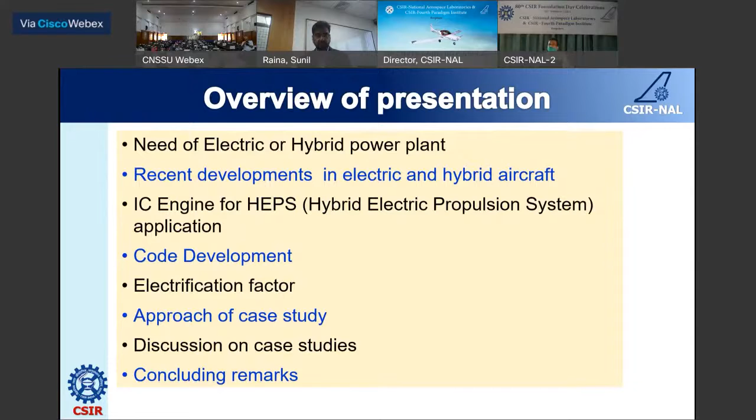There was a requirement to develop a code to analyze the performance of the aircraft for different proposed power plants, so I will briefly discuss the code development activity. Then I will discuss the details of the present case study with its results and concluding remarks.

In the process of converting the fuel into products, a combustion reaction happens and heat is released, and this heat is used to do the work called thrust. In the process of getting energy out of the fuel, combustion products are produced: water vapor, carbon dioxide, carbon monoxide, unburned hydrocarbon fuel, and NOx. This carbon monoxide and unburned hydrocarbon represent the degree of incomplete combustion.

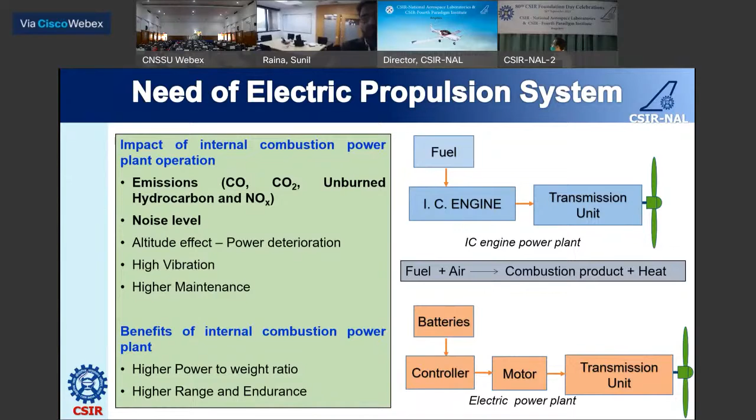But still, the major advantage of our conventional IC engine power plant is the two things I showed here: one is the high power to weight ratio, and another is the higher range and endurance. Why is this still beneficial for IC engines? What was the issue with electrical propulsion with respect to this point will be discussed in the next slide.

But in the case of electrical power plant, we have a really efficient motor with lesser weight, but the major weight is occupied by the battery, which is close to 11.5 kg. This shows the minimal energy density of this battery technology available today.

If you take the battery energy density available, it is close to 250 to 300. These numbers are continuously increasing, and a lot of research is going on to further improve this number. But if we compare this with petrol density, it is 50 times lesser. Our fuel has an energy density of around 12,500 watt-hours per kg.

So in order to compare these two, we have to bring in the efficiency of the machine also. The motor has an efficiency around 90%, and the engine has an efficiency around 30% only. If you convert this, the power density of the electrical power plant per kg will be 6% of the power density of the IC engine power plant per kg of fuel used. So this is the major limitation in the area of battery technology. This needs to be improved.

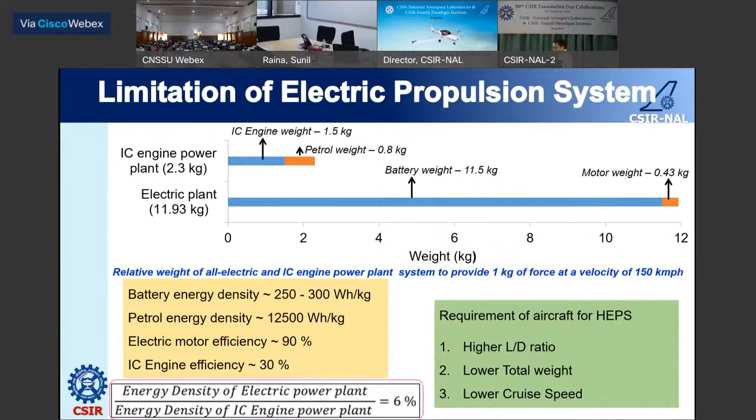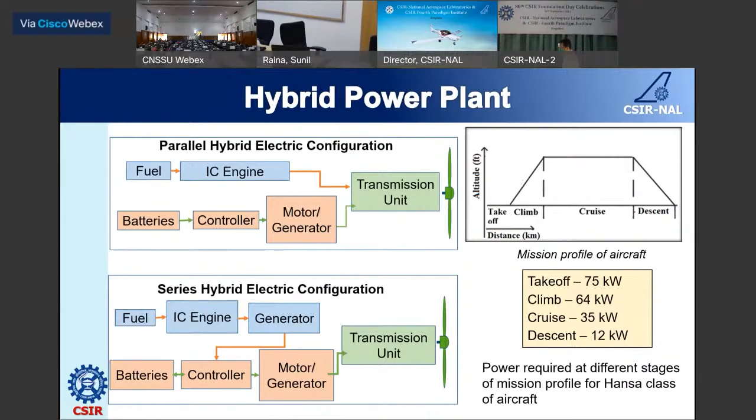There is one more aircraft called the Extra 330 LE, also a 2-seater aircraft, with an endurance around 24 minutes, and it had a feature of a higher rate of climb capacity.

Later, these all-electric aircraft were converted to hybrid mode in order to increase range and endurance. So this Pipistrel was converted to hybrid mode, where a series configuration is used with the Rotax 912 engine, and they use a motor of around 150 kilowatts.

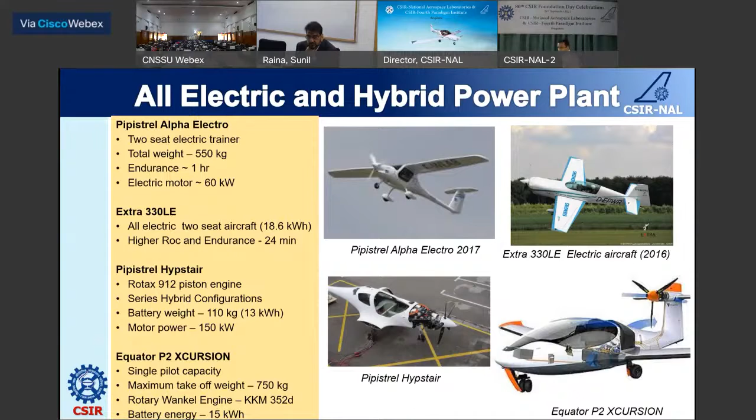There is another aircraft, initially started with all-electric mode, then converted into hybrid mode with a rotary engine, and the maximum takeoff weight is 750 kg with a single pilot capacity.

There is another aircraft from the University of Cambridge, a single pilot aircraft called the Song aircraft. This is an ultra-lightweight composite aircraft using a series configuration. This configuration was also demonstrated.

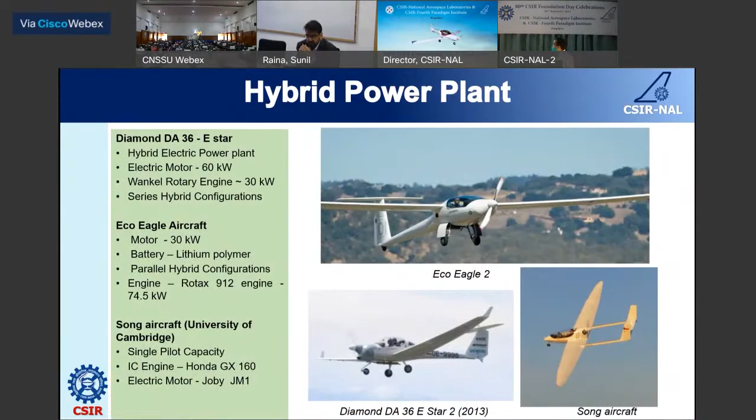Now the idea is using existing IC engines to constitute the hybrid electric power plant. With that direction, we have carried out a list of IC engines available for this class. As of now, there are no ready-made IC engines available for hybrid application, but in the near future we can expect engines designed for hybrid applications. So only existing engines of these classes are converted for hybrid power plant systems.

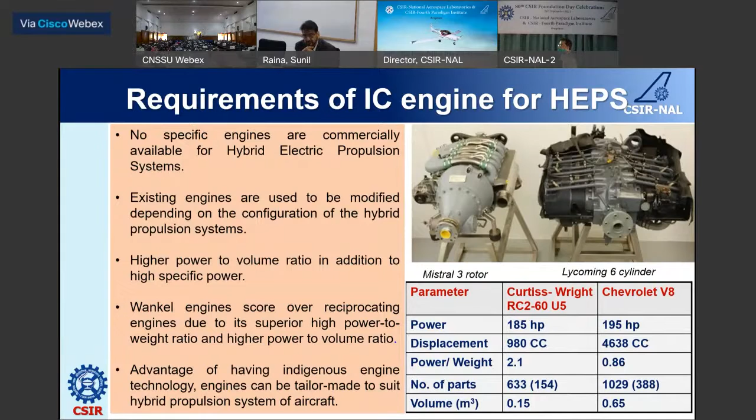Here is another product of NAL, the NAL 65 HP rotary engine. At NAL, we have developed expertise in rotary engines for different power classes. The 55 HP rotary engine was used to fly the Nishant UAV, the 65 HP rotary engine was developed for Panchi UAV application, and another 30 HP engine was developed for an air-cooled concept.

These are all the specifications shown for the 65 HP rotary engine, and this is used to construct this hybrid power plant. The performance of this engine with respect to aircraft performance is considered in the present feasibility study.

The overall idea is, within the bracket, the power of the Hansa aircraft is shown. During takeoff, around 75 kilowatts of power is required. Out of this 75, around 48.5 kilowatts of power can be taken from the Wankel engine, and the balance will be taken from the electrical unit with the combination of battery and motor.

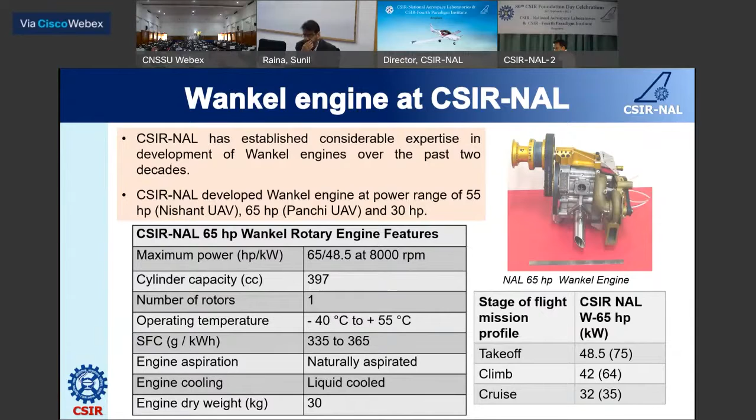In that direction, we have done a feasibility study. In addition to the existing Wankel engine, we have considered some more IC engines available, and the power class of around 50 to 65 HP engines are selected. Here, in addition to the rotary engine, we have shown some reciprocating engines of both two-stroke and four-stroke.

Here, again, you can see with respect to power to weight ratio and power to volume ratio, rotary engines are showing a higher number compared to piston engines.

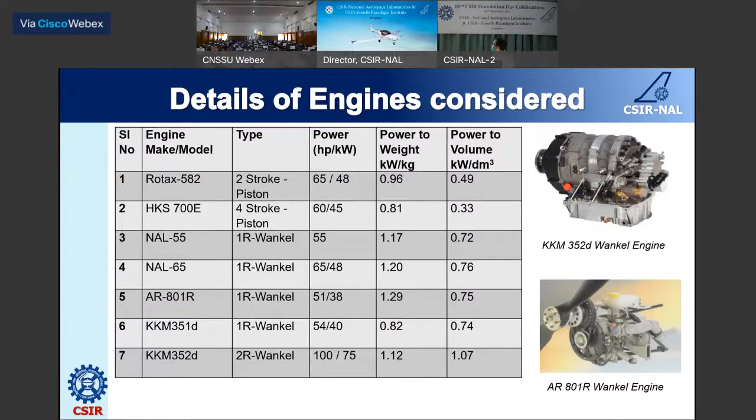Based on this number, we have carried out the volumetric feasibility calculation. We have taken the existing model cowling of the Hansa NG aircraft, and proposed the IC engine power plant with the electrical motor and battery to see if they are able to fit in that. Based on that, two of the IC engines could not be fixed within the existing cowling, so these two engines are rejected and removed, and five engines are used for the case calculation.

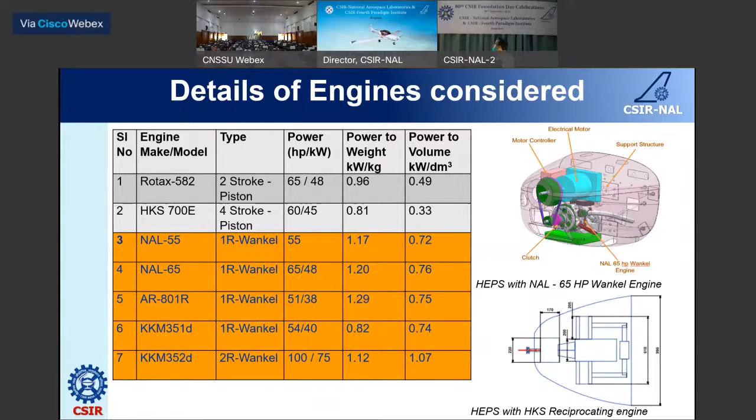Here the battery and motor details are shown. The Rotax engine is taken, and the motor is taken. There are two motors considered in the present analysis. The 17 kg REX motor with a power of 50 kW is taken for the hybrid configuration.

In the present feasibility study, we have also considered an all-electric power plant, which requires a higher motor. So around a 70 kilowatt motor is taken for the all-electric case, and three different battery packs are chosen. Based on the power and merit category, one of the battery packs and one motor is chosen for each case.

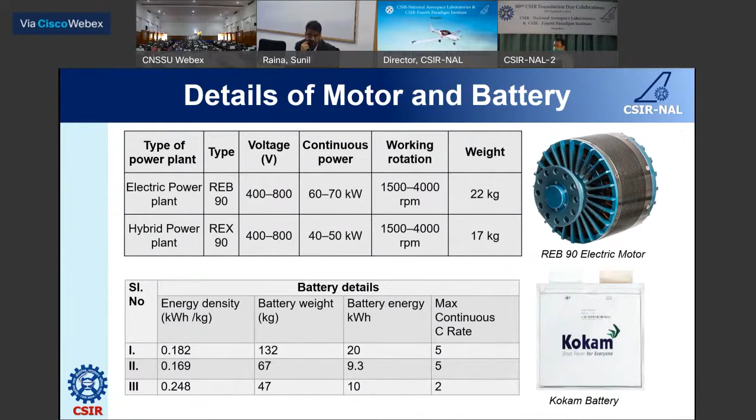There is a requirement to develop a code to calculate the range and endurance of the aircraft for different power plant usage. So we have developed the code. Here the thrust power of the aircraft, propeller power, and engine powers are equated together, and the overall range and endurance are calculated.

The approach takes the propeller characteristics, engine power characteristics, and aircraft parameters into account. In each stage of the mission profile, the distance covered by the aircraft, the time taken, and the fuel flow consumption is calculated using this equation, and the overall range, endurance, and total fuel consumed is calculated.

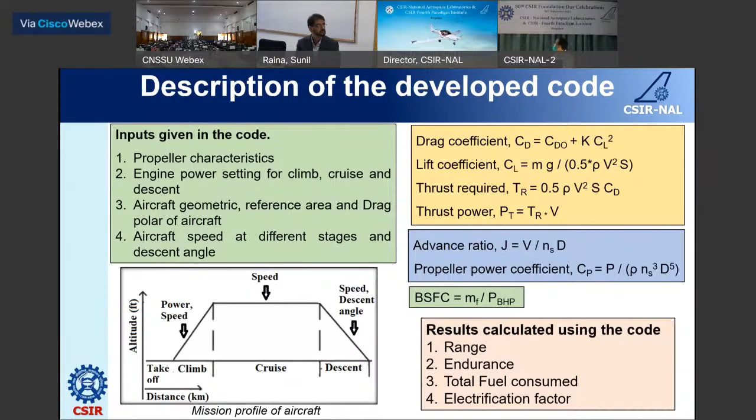These are all the performance plots used inside the code to arrange the results, and here the major architecture of the code is shown.

The operating conditions vary with respect to each stage of the aircraft, and cruise altitude variation and densities are considered. During the climb stage, the engine power is balanced with the propeller power, and with the propeller efficiency, thrust power and other forces of the aircraft are calculated.

During the cruise stage, the four forces of the aircraft are balanced first, then based on the thrust and thrust power, the engine power is calculated. Finally, the code gives the result for range, endurance, and total fuel consumption for different configurations of the hybrid power plant.

Initially, the results of this code were compared with the available data of Hansa NG, and with 3-4 iterations of fine tuning, the results of the code matched very well with the available data. This gave us confidence in using this code for hybrid power plant applications.

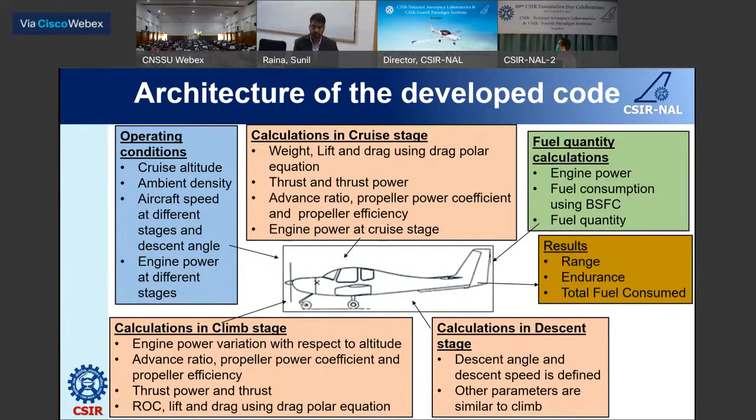In order to implement the hybrid power plant, a component factor called the electrification factor is taken into account. The electrification factor is defined as the power from the electrical unit divided by the total power available in the configuration, which is the electric power unit divided by the sum of electric power plus IC engine power.

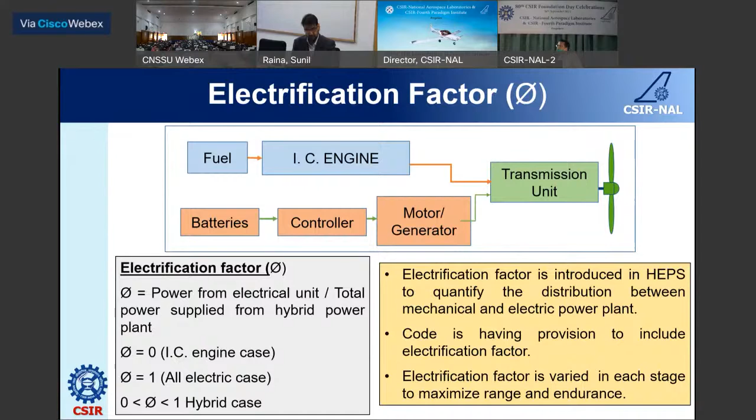With this definition, phi equals 0 is the IC engine power plant case, phi equals 1 is the all-electric case, and phi varying from 0 to 1 is the hybrid case. We made a provision to use this code to investigate the effect of this electrification factor, and we have optimized the range and endurance with respect to this.

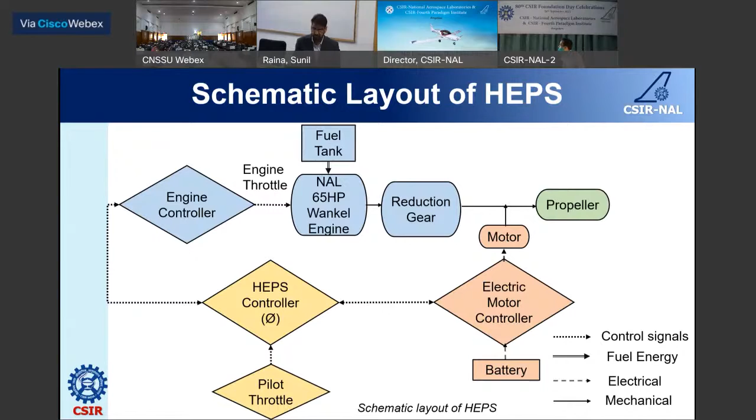This is the overall schematic layout of the configuration. In addition to the electric power plant and the mechanical power plant, we should be able to develop the electronic controllers also. So two controllers are required: one is the engine controller to vary the power settings with respect to the requirement, and there is the electrical motor controller required. These two controllers will communicate to the hybrid electric propulsion controller, and it will be controlled through the pilot. So this is the overall architecture of the HEPS configuration.

This is the major outcome of this work. For the present hybrid power plant construction case, this is the condition we have taken: the existing Hansa aircraft power plant weight is close to 115 kg, and the fuel weight is close to 85 liters of fuel, around 65 kg. The total weight is around 180 kg.

In the hybrid power plant case, we kept the same weight of 180 kg, where the IC engine, motor, battery, and fuel weights are kept well within the 180 kg. So the power plant weight of the proposed hybrid unit and the IC engine unit was maintained constant, and the overall all-up weight was kept maintained constant. The present Hansa engine has an all-up weight of around 750 kg, and we have maintained the same case.

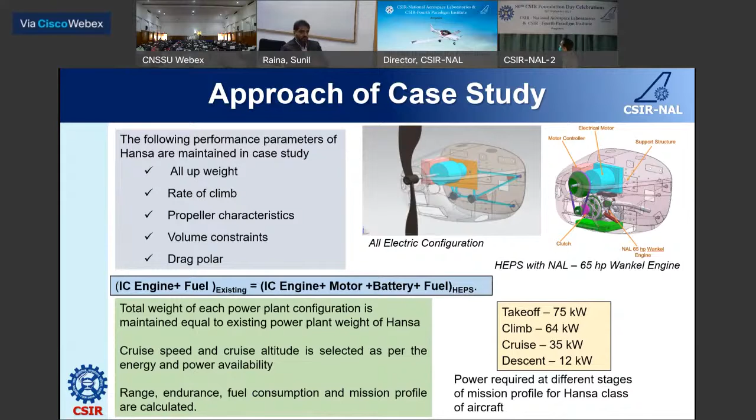The rate of climb, propeller characteristics, volumetric constraints, and drag polar of the existing Hansa are maintained the same. Now there is a different power requirement at different stages of the mission profile, so each proposed configuration will meet this power requirement with respect to the electrification factor. Here the volumetric feasibility study characteristics are shown, and here the results are available.

As I already mentioned, the all-electric case is also considered as a reference case, so we can see how our all-electric case compares with hybrid in terms of range and endurance. The present Hansa has a range around 900 kilometers with an endurance of 6 hours by using the IC engine power plant. But the all-electric case can give a range around 80 kilometers with an endurance of 36 minutes.

During takeoff and climb itself, almost 50% of the energy is consumed. The balance 50% is used to do cruise and descent. Since the energy availability was limited, we fixed the cruising altitude close to 4,000 feet, and the cruising speed is maintained close to 160 km/h.

In this study, three hybrid configurations are taken with three different engines, and the balance energy will be supplied by the motor and battery configuration, represented in terms of electrification factor value. During takeoff, the electrification factor is maintained at 0.21 for the AR801 engine case, and these five cases represent different electrification factors, moving from the all-electric case to different hybrid propulsion configurations.

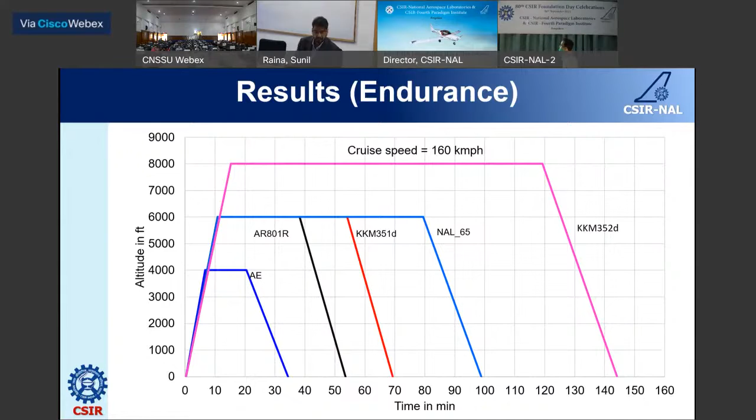And this is the range distance - the NAL 65 can reach up to 240 kilometers. In addition to range and endurance calculation, we calculated CO2 quantification per kilometer. Compared to the IC engine CO2 values, the hybrid power plant values are much lesser.

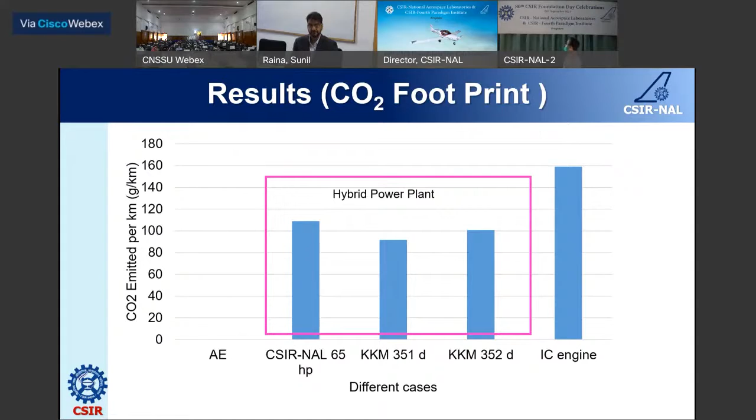And in addition to constructing this hybrid power plant, these are all the major technology challenges: identifying the compact electric motor and the higher power density pack, thermal management of battery, motor and generator configurations, and importantly, aeronautical certification.

So from our case study, these are the conclusions we are making. It is possible to convert the existing aircraft as an all-electric or hybrid unit, and the developed code was very much useful in order to estimate the preliminary performance of the aircraft to get the range and endurance.

In the all-electric case, with the ceiling limitation of 4,000 feet, we could be able to get the endurance around 36 minutes. And with the proper selection of engine configuration, the cruising can reach up to 8,000 feet with the endurance from 1 to 3 hours.

And the CSIR-NAL 65 HP engine is a prominent contender to use this hybrid configuration. And the CO2 footprint of HEPS is reduced by 42% in comparison with the existing conventional ICE engine.

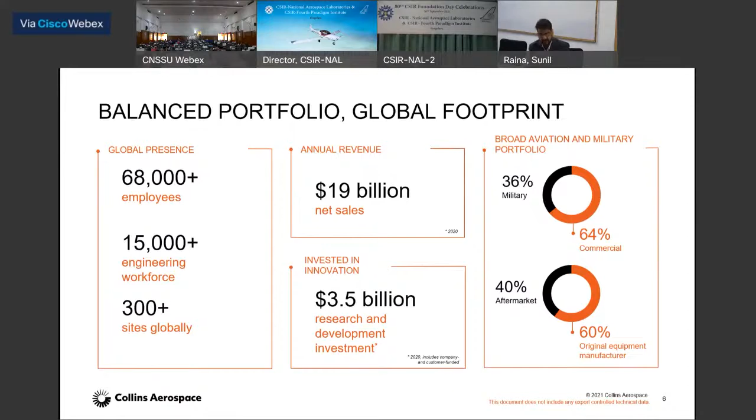We are not a US organization anymore. 300 sites globally. Even in India, we have about 6 sites today, and a lot of engineering force globally, about 15,000 plus.

The way Raytheon is divided into 4 business units, Collins Aerospace in itself is divided into 6 major segments, which we call strategic business units. Obviously, we touch almost every part of the aircraft today, so it was very important for us to divide those different pieces into different areas like aerostructures, avionics, interiors, power and control. Mission is mostly the government or defense side of the business, and then mechanical. We'll go a little bit more deeper into each of them.

Aerostructures, as the name suggests, it's more about composites, the nacelle systems, the structures which we manufacture. We are doing a lot of innovation on that, so that is where aerostructures comes into picture.

Avionics, we have done a lot of business with NAL as well previously. It is mostly the avionics systems, but with United Technologies coming in, we are now into cabin management systems, sensors, and fire protection. I wanted to touch a little extra on information management. It is not only the data link piece there, but we have a big stake in airports globally now. In India, we are working with Airport Authority of India, and with the private sector, trying to see how we bring our latest technologies to the airports here, especially with COVID, the lot of contactless is the way going forward.

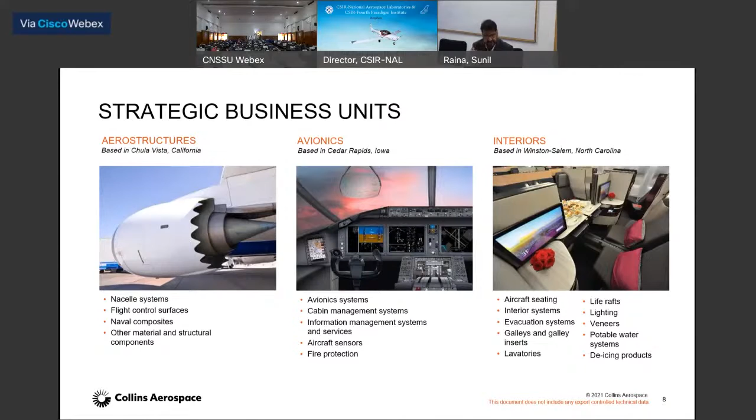Interiors, the name suggests itself, anything in the interior. Talk about the seats, or the galleys, or the lavatories, lighting, veneers, anything on the interiors part we are dealing with today.

Mechanical, we are into landing systems, actuation, propellers, control systems. Similarly, mission is more critical towards defense. It is not only the ground-based equipment and nav we sell there, but we are using our technologies from the other SBUs and giving it to military platforms. We have a lot of business on the space side from this business unit, especially even with ISRO here in India, where we are working and giving them some solutions. We are also working on unmanned aircraft systems.

We are not developing an unmanned aircraft, but more towards the complex systems which are required to fly those kinds of aircrafts, and then the ejection seats for the military platforms. Going towards the controls, we are handling all the control, whether it is engine, electrical, air management - all the power and control systems are being run from the Windsor Locks, Connecticut.

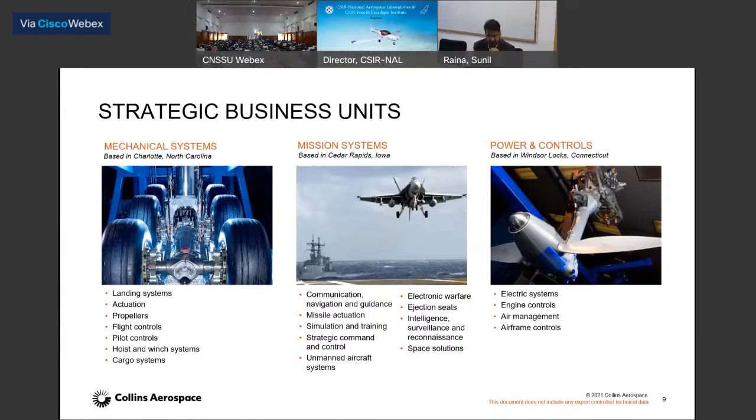So literally, if you see, for the aviation industry, the moment you leave your house and by the time you reach back to your destination, we touch the lives of the passenger, aviation industry, airlines, customers, and end users, baggage, anything. We touch almost everything from ground zero to ground 100.

So it's not only about sales. We want our products out there in the market - they are technology proven, reliable equipment - but then still we have dedicated customer service employees, about 10,000 of them, globally committed to give support day in, day out. We have 6 technical labs globally handling 24/7 support. Any customer, in any remote corner of the world, at any part of the day, has a response center number they can call and we will help them, just in case they are outside the working hours for that country. And then apart from that, you have your own in-country service engineers. For us here in India, we have almost 6.

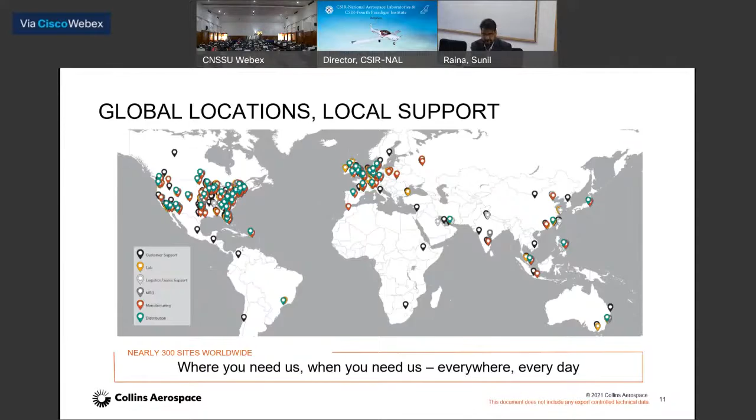So moving from globally, I just wanted to touch a little bit about India. We started very early in this country, understanding that we need to have a presence here locally. Today we are proud to say that we have about 5,000 plus employees in India, mostly based out of Bangalore, which is our global manufacturing hub, and Hyderabad, which is our engineering hub. It is literally an end-to-end supply chain for avionics, mission systems, and many other critical SBU technologies being developed here.

We do not only export to our own internal company, but we also supply directly to other OEMs like Boeing, Airbus, Embraer. We send the equipment manufactured here, sometimes directly to the end customer as well. So we are one of India's exporters of aerospace products and also among the top exporters here. We are doing what today is a big mantra - Make in India - we've been doing it for a long time. We had started thinking about it a long time back, and that's why we have a bit of a head start there, especially with our competitors here.

Just quick locations: Bangalore, Hyderabad, Delhi - these are the major places where our major offices are. But apart from that, we have our technical people situated in Mumbai, down south in Cochin. So we are surrounded across India. But Bangalore, as I explained, is mostly manufacturing and engineering - the biggest chunk is out there. We are at the moment in Whitefield, but I will explain a little bit of future plans in further slides.

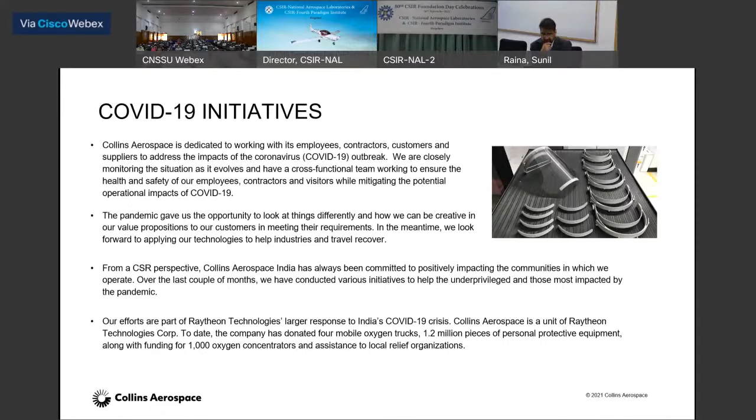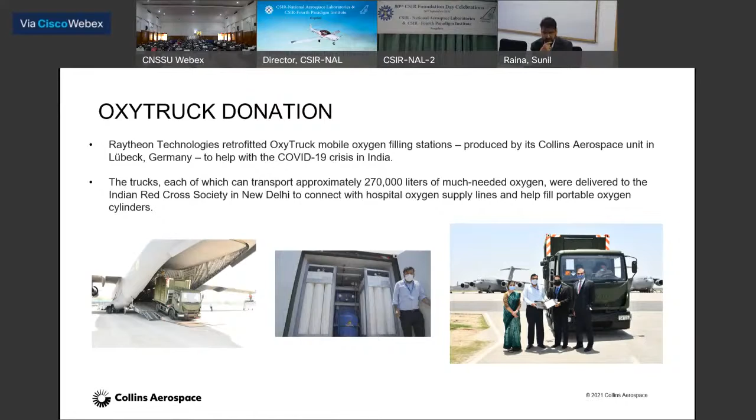It was handed over to Red Cross, along with a lot of protective equipment and oxygen concentrators. And not only that, with the help of our own team and doctors, I think we also set up a mobile hospital during that time, just to reach those people who were in need of health facilities. There are some pictures of handing over those oxygen trucks to the Red Cross on the Palam side in Delhi. It helped a lot, and I think it was really appreciated by the press and the government side.

Vaccination drives, obviously, we went ahead and did vaccination drives in Karnataka. Since we have a bigger workforce there, you need people for that support. So we went ahead and did that as well.

We all understand that COVID has definitely impacted us, and we as a country have really struggled very hard to come out of it, and we are doing very well. There's no doubt in that. We are on the growth path back. So we need to figure out how to get our industry also as quickly as possible back on track.

So just wanted to touch on some of the initiatives Collins is trying to do to help aviation come out a little faster out of what we have gone through. First and foremost, we basically have 6 initiatives today across Collins, and not only Collins, we are also using our other BUs, because we are in a unique place today where we can use each other's technologies and try to provide a solution for the industry.

So connected ecosystem, I want to touch on this. We saw what important digital has done to our last 1.5 years, to our lives, and even now today, just because I couldn't connect properly, it put everything on stop for a couple of minutes. So digital is very important. What we are trying to do is make our equipment smart, in the sense that data can be collected, sent over the data link, and we can provide an end-to-end solution and service to the end customer.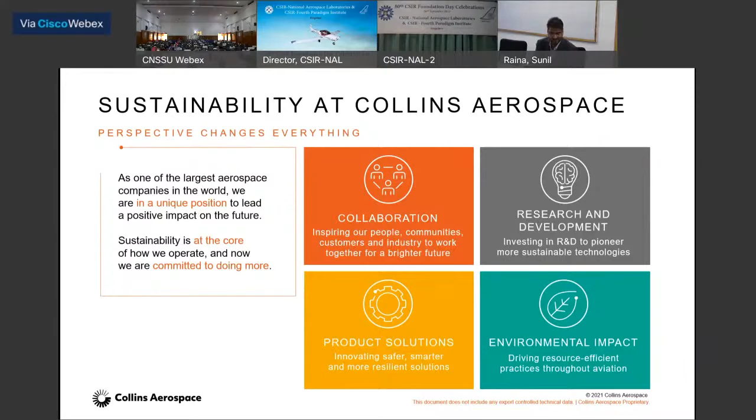Out of these 4 pillars, I just wanted to give a little explanation on how we set the goals. I picked the environmental side since we are near the end, but wanted to let you know what goals we are trying to set. From 2015 till today we have already reduced a lot, but our goal for 2025 is to literally reduce emissions.

For in-house greenhouse emissions, we are almost literally implementing 100% water waste treatment, so nothing gets out to the environment. We're trying to get that to 100%, reducing waste, landfill, all that. Every 1% reduction is a lot of investment, so it may seem small, but it takes a lot of investment on our part to make sure humanity should not suffer. So that's one example of how we set goals for our future.

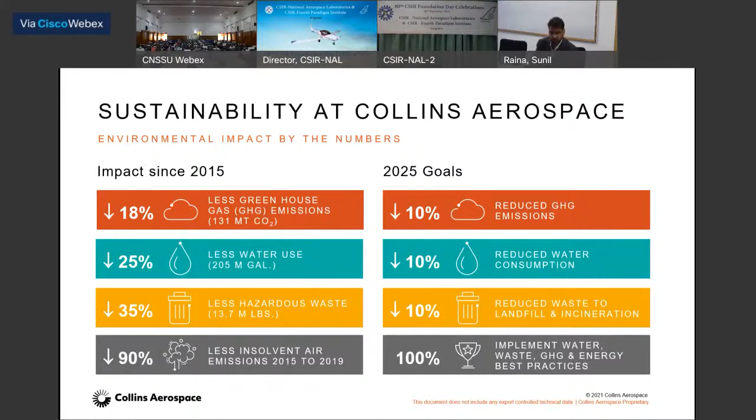The way this works is once you go to the kiosk, you can just point your mobile phone towards it and you get all the controls that are on the kiosk on your phone, so you don't need to touch the kiosk and can work from your phone. We have that working already in some airports globally. So from the moment you land at the airport until you board, you do not have to touch anything if the airport has all these smart systems installed.

We brought that technology and it has been accepted globally across the industry. We are working with the airport authorities here, and with private airport service providers, to explain how this will work. There is a lot of interaction going on, and interest in bringing those state-of-art things to the country.

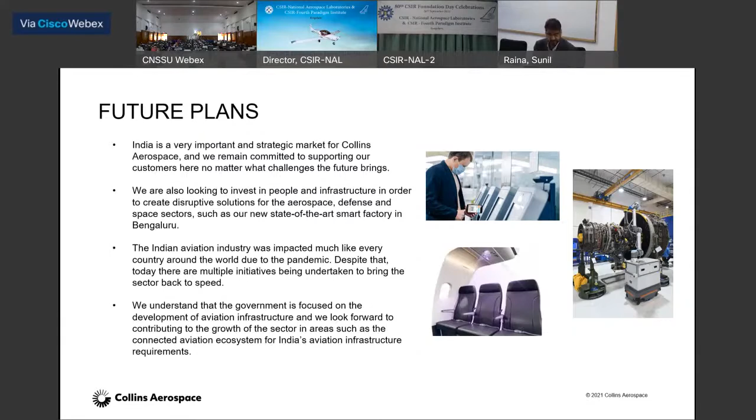So a lot of investment is going in, a lot of labs are being built in India. We as Collins Aerospace are definitely invested here, and we want to work closely with the government to see how we can bring this sector back to growth, especially with our connected aviation ecosystem for Indian aviation. And as Raytheon, we have critical infrastructure digital security that is end-to-end, whether it is a nuclear plant, a space mission, or other boundaries, so we can provide those critical end-to-end solutions for any missions.

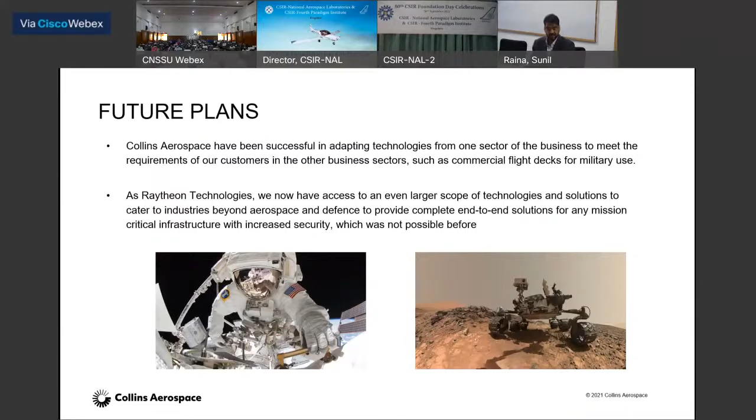And then the last one, but not the least, there is a lot of technology now which was previously used in commercial flight decks but is now being used for military use. We are trying to see how we can utilize those plans, especially in India as well. So I think that is it from me.

I know I went very fast, a lot of things to be cleared, but let me know if you have any questions. I am here, I can share. If I can get an answer straight away, I will. But if need be, I can get back through the team, and answer some questions in case there is somebody who needs more interaction. My details are there, so you can always connect with me directly as well. Thank you very much, and thanks once again, Mr. Jadhav, for giving me this opportunity.

Thank you, sir, for giving an insight into Collins Aerospace activities and its initiatives. Hope NAL and Collins Aerospace will collaborate for ongoing and future aerospace programs.

I request our chief guest to formally launch the ICAST website. Information Center for Aerospace Science and Technology, the ICAST web portal, is redesigned to provide single-window access to several web-based information services to the CSIR NAL community. The major web services integrated are eJournals Gateway to access online journals, WebOPAC to search physical holdings of the library, digital library platforms, Shodh Pawan, a discovery platform for scholarly literature, Scientist Profiling Service to capture SCI publication metrics of NAL, Prakash to capture internal technical literature, NAL Open Access Repository, and off-campus access to resources anytime, anywhere, along with research support services.